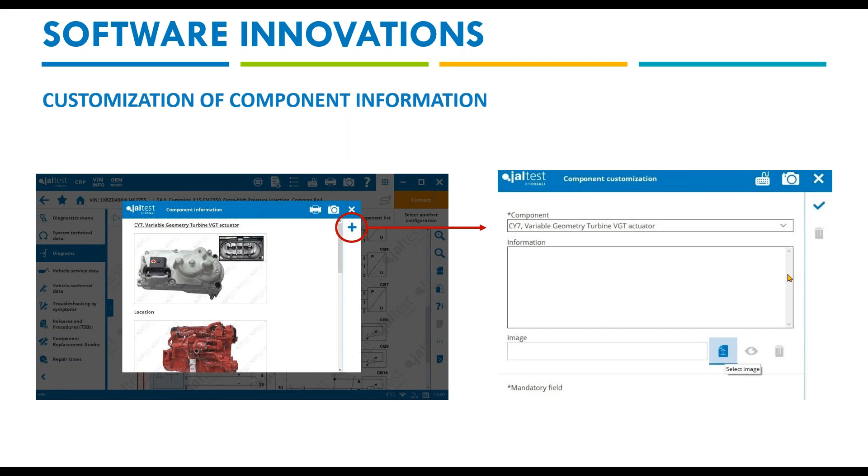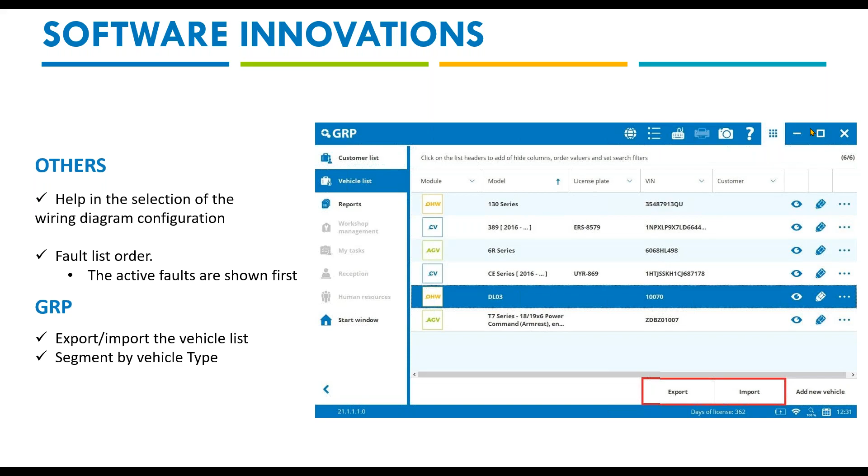So once we've seen the main software improvements, let's go ahead and explore the main innovations added in this 21.1 version for commercial vehicles.

Before starting, I'd like to make a quick note to remind you that you can always check our coverage through Jaltest Report, located in the customer area once you log into jaltest.com. Or if you prefer, you could go to our website, either jaltest.com or Cojali USA, and look for the coverage section.

So we start our way through the different vehicle categories, focusing now on the most important innovations for heavy-duty vehicles. It's important to mention that we're going to highlight the most important innovations so as not to make the webinar too long. However, there have been many more developments for the different brands and systems.

So if you'd like to know all of them, please access your customer area again and find the documents with all the details.

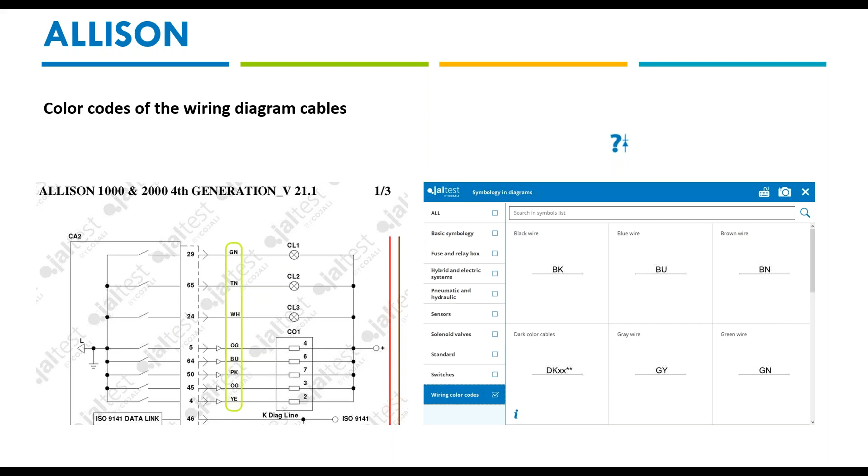So starting with Allison, we have included the color codes of the cables in the wiring diagrams so that physical checks of the wires become easier. As you can see in the picture, each color has a two-letter nomenclature, and although it's very intuitive, in case you want to make sure and not be wrong, just go to the help guide on the right side, where you can check the color meaning.

So let's move to Caterpillar now. As you may know, some specific functions in Caterpillar are protected by a factory password, for example whenever we want to clear those faults called events, or when we want to carry out advanced controls related to the DPF system.

From this 21.1 version, we have included factory password management so that, for example, we can perform the DPF ash service reset or the DPF replacement, both in the EPA 07 engines. Also, this factory password management will make possible the modification of the engine serial number.

And it will even allow us to clear those fault codes called events from the system's memory, as we said before. It's important to take into account that the code or password itself is not provided by Jaltest. So if you're wondering how to get it, you could always go to your dealer or even ask Google.

For Navistar International, we continue adding advanced dealer-level functionalities that until now were only possible through Diamond Logic Builder, the OEM tool. In this case, more than 450 bidirectional tests for the body controller module have been added, such as different component actuations or activations related to lights, doors, switches, etc. These activation components are very important to make sure that the wiring is correct and that the component is acting the way it has to.

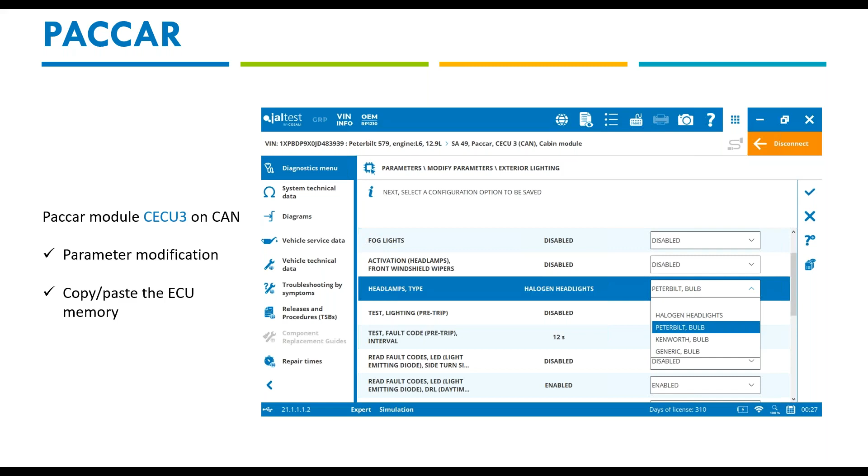So let's move to Volvo and Mack. In each update, we work to expand the references and variants of all the systems, increasing the coverage and ensuring the reliability of interactions with vehicle systems. It's important to mention that electronic systems may have many different variants, even over 1,000 of them, as happens in Volvo.

Well, until now, you had the chance to send Jaltest feedback to let our customer or technical team know about it, and many times, with their help and connecting through an advanced mode, we could help you to connect. So from this version, we go a step forward and give you access to extended and updated coverage in new software references and system variants through web services.

What does it mean? Whenever you have that unknown system variant message we mentioned before, in addition to sending this Jaltest feedback, you could search your system variant in our database through our web services. You will need an internet connection. In this way, if you are lucky and your system variant had been recently added, you could connect to it and have access to the full capabilities of that system.

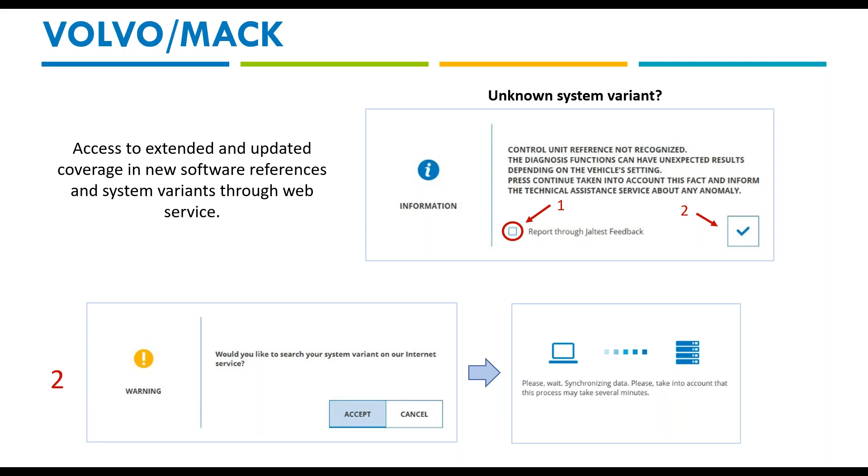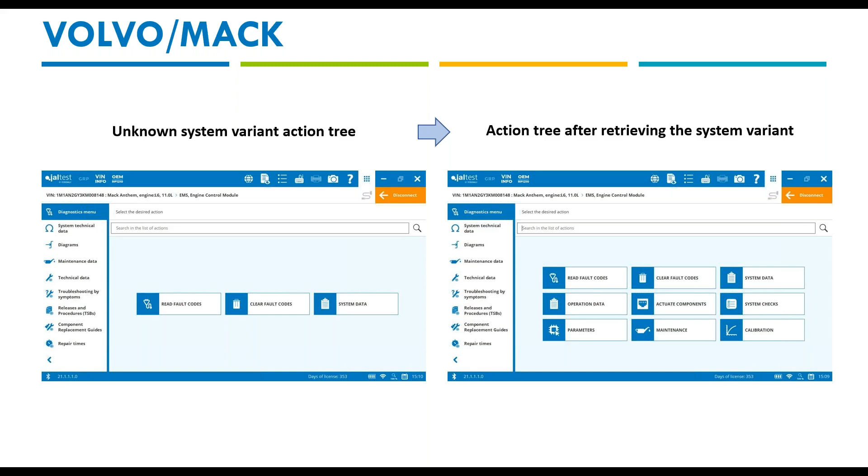Before going forward to the light commercial vehicles, I would like to mention, also related to the Volvo Mack system variant, that even if we're highlighting this innovation in the commercial vehicle section, this is also applicable to the off-highway model, since the B3 technology of Volvo is present in these vehicles as well.

Now, let's move forward and see what is new for light commercial vehicles.

In this 21.1 version, we will see how the family of makes and models included grows with the addition of light and medium duty 2020 and 2021 models with 7.3 engine, from F650s, 750s, and also the pickups and the Van E series.

In addition, we improved the capabilities for the PCM Cummins 6.7 engine found in Dodge Rams from 2013 to 2017. Related to this manufacturer, although not in this version, we would like to announce that very soon we will have the unlock of the security gateway for 2018 and newer models, which is necessary to perform diagnostics on these models, as you know well. That is something many of you were requesting, so we worked on that, and it's coming shortly.

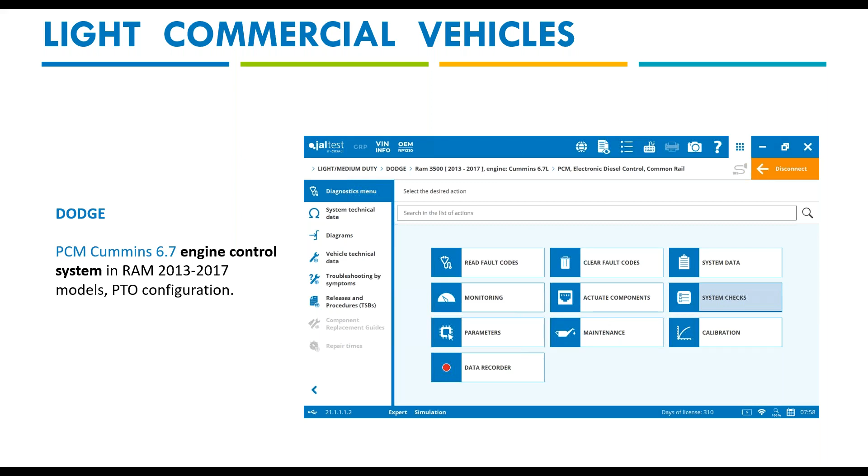Moving to trailers, the Gen 2 or GEN2 ABS system from Globtech Manufacturing has been added. For this one, we will find diagnostic capabilities, live measurements, ECU data, and technical information.

And with this, we put an end to the part of the webinar dedicated to general software innovations and innovations related to commercial vehicles.

Next, we will talk about innovations for off-highway vehicles and agricultural vehicles and equipment. For all of you interested only in commercial vehicles, I would like to say thank you so much for joining today, and of course you are more than invited to continue watching.

Okay, thank you. So the new brands we have integrated in Jaltest off-highway are the ones you now have on the screen. That includes, for example, XCMG, one of the biggest Chinese construction equipment manufacturers. Also, we have new material handling makes like Jungheinrich, Skytrak, or Toyota, but also other makes like Dressta, Vermeer, and stationary engines like Himoinsa.

Jaltest off-highway is the largest aftermarket solution in our industry, bringing dealer level coverage in more than 3,000 systems and more than 100 makes. But it doesn't mean our work has concluded. We are committed to this development, and Jaltest is growing every 4 months with more coverage, more technical information, and more functionalities designed for our customers' needs.

So let's have a look at some of these new updates, starting from earth moving equipment, and it couldn't be in another way than starting from Caterpillar. We have a new system in telehandlers and excavators, the MCM, that covers the hydraulic system for this machine with dealer level bidirectional test, like the calibration in the solenoid valve. Through this task, the ECU will learn the minimum and maximum position of the valve, and it's a manual process in which Jaltest will let the technician know how to use the joystick in order to configure this minimum threshold in which the ECU will sense the electronic communication.

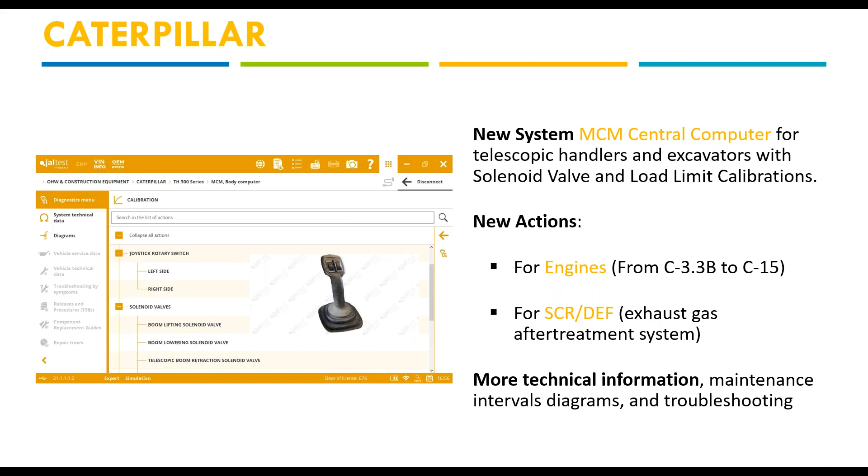Let's continue now with Volvo construction. We have integrated a new calibration for wheel loaders that came directly from our customer petitions. As Marcos already mentioned, we are always trying to develop our solution by following not just the market needs, but also our customer petitions. We want to provide you the most personalized solution for your diagnostics, and this is an example of that.

This is a calibration that is now available in all Volvo wheel loader L series. It's a transmission calibration that, through an automatic test, allows you to adapt and improve the performance of the transmission by connecting directly with the ECU electronically.

There are several reasons why a calibration is necessary, for example after changing a component, after repairing the system itself, or when we want to improve machine operability. After hours of hard work, sometimes the machine starts to operate more abruptly, so this type of transmission calibration is the perfect maintenance to allow the wheel loader to work finer. Workers will have greater comfort carrying out their work, since the calibration reduces vibrations and wear, and finally prevents the breakage of different components.

Also, we have new systems for Volvo, the ones you have on your screen. For example, the TECU transmission system, the VECU central computer system for wheel excavators, and also the exhaust gas after treatment system with options like the fuel shut-off solenoid and the leakage test, plus more new system checks in all these systems.

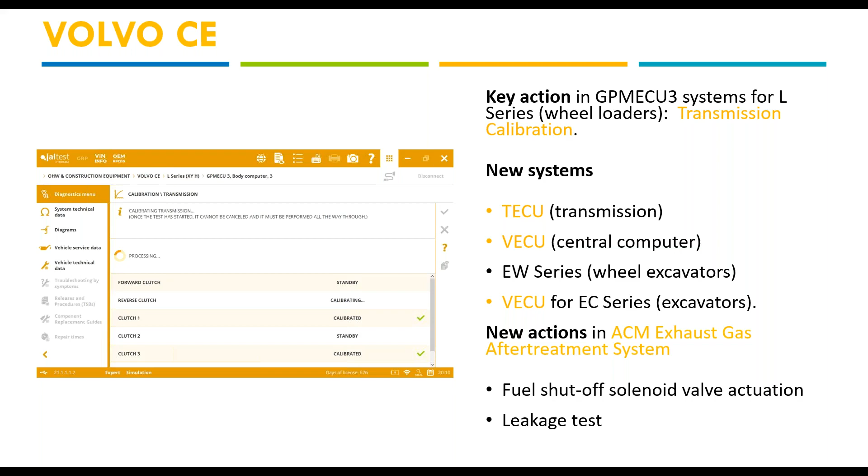Regarding the rest of the earth moving equipment, we have more innovation in other makes. For example, in John Deere, that my colleague Isidro will mention later, or in JCB, in which we have included a new system for excavators and new coverage in the engine of the Diesel Max engine.

I will continue now with material handling equipment, starting with JLG, the most used make of material handling equipment in the United States, where we have greatly increased the coverage in all the models since the last updates. I don't know if you remember, but in 20.3 we integrated dealer level coverage in the software for all the hydraulics of all JLG models.

But we have kept working on this make, and now we have added a lot of technical information, like the maintenance intervals in both hydraulic and engine systems. For example, this time we have a lot of maintenance for Deutz engines, which are the ones that power the biggest JLG machines.

This information is very interesting, especially for rental companies, that can now perform not just the bidirectional test in all the hydraulic system, but also know the recommended maintenance interval in order to work on their own. Once again, Jaltest Software works following one goal: bringing all makes and all system coverage to our customers in order to make them more independent and free when repairing their assets. In other words, you are working with your machines, and we want to provide you a solution that allows you to repair your own machines.

For the rest of the makes regarding material handling equipment, we have interesting developments as well. For example, in Bobcat, we have a new system for telescopic handlers. Also, we have integrated a new system for Linde with a new connector, the GDC 552, a connector for the electric vehicle, plus new functions in Kubota telehandlers, as well as new makes such as Toyota and Skytrak.

I will conclude this part with the new coverage in stationary engines, that is a model integrated in the software. I would like to start with Cummins, because our engineering team has worked really hard on this manufacturer during the development of this 21.1 update.

First of all, I would like to thank them for the great job they have done. Now we can say that the Jaltest Software brings dealer level coverage in Cummins QSF 3.8 engines, because we now have all the bidirectional tests in maintenance for this model. This update means a lot, because customers will be able to perform advanced actions like the SCR catalyst converter regeneration or a DPF replacement without needing the dealer. As you can see in the software screenshot, there are now dozens of bidirectional tests available and supported, as always, with the best technical information.

There are more updates for Cummins and other models. For example, new functions for QSB 4.5 and 6.7 with accelerator lock settings and the SCR system operation test. For QSG 12 and QSX 15, we have introduced in this update the removal of the SCR system inducement mode. That is very useful when we have these blocks because of the after treatment system, and this will provide extra life in the machine.

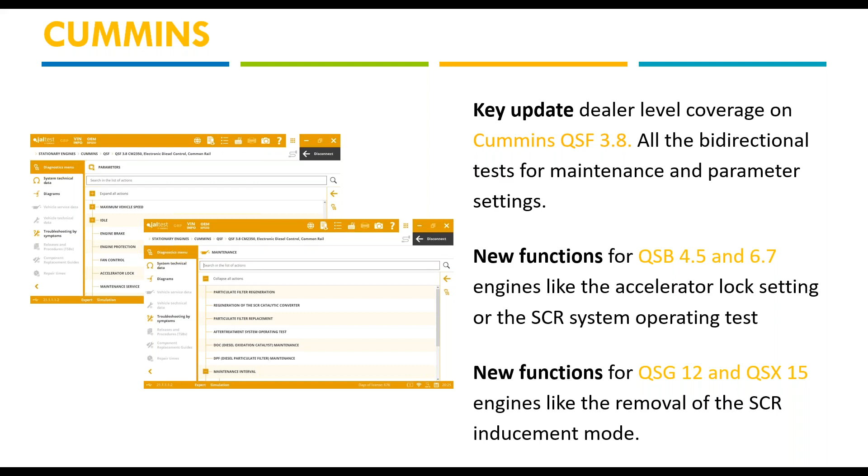Continuing with stationary engines, I would also like to talk about Deutz, because this 21.1 update is an example of the innovation and vanguardism of Jaltest off-highway. For example, we now cover tier 5 engines, an example of that is Deutz. That is the latest emission regulation in the market, which reduces CO2 emissions by making the engine and after treatment systems more advanced in terms of efficiency. What I wanted to highlight is that Jaltest covers the latest models with the best coverage possible in the aftermarket industry.

For the Deutz MD1, one of these latest engines, we have provided advanced tasks like the pressure relief valve reset, a very common maintenance action in Deutz engines that was available in previous models but is now also available in tier 5. It's very common because the pressure relief valve counts the number of times the pressure overrides the estimated pressure within the common rail. When this number reaches its maximum, we need to change this valve and install a new one, so we need to perform this reset.

Sooner or later we will need this, and if we do not have the coverage, we will need to go to a dealer service or another shop that can carry out this type of reset, which again are very common in Deutz engines.

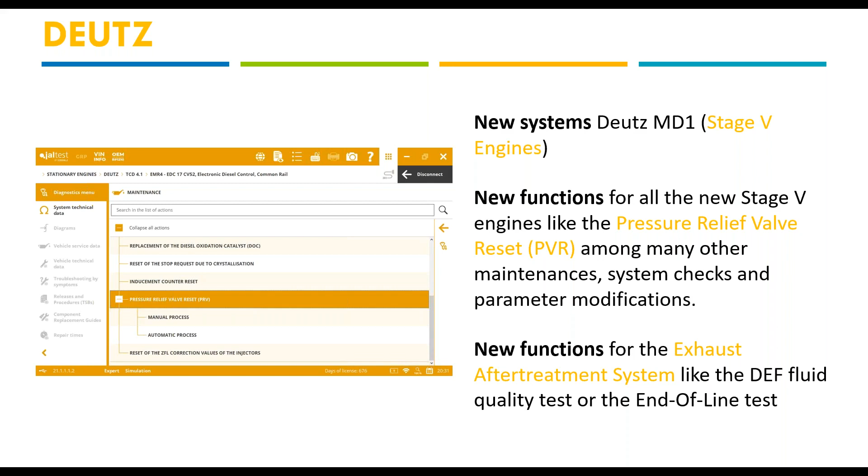I would like to finish by letting you know what is coming now and what we are currently working on, just to highlight again our commitment to keep improving this project every 4 months. For example, we will expand our coverage in material handling equipment with more proprietary systems in the hydraulics, more makes, and also more coverage in Volvo Penta, Cummins, and Deutz engines, with new updates for example in Caterpillar excavators. Stay tuned, because we are working hard to keep being the best aftermarket solution for off-highway machines.

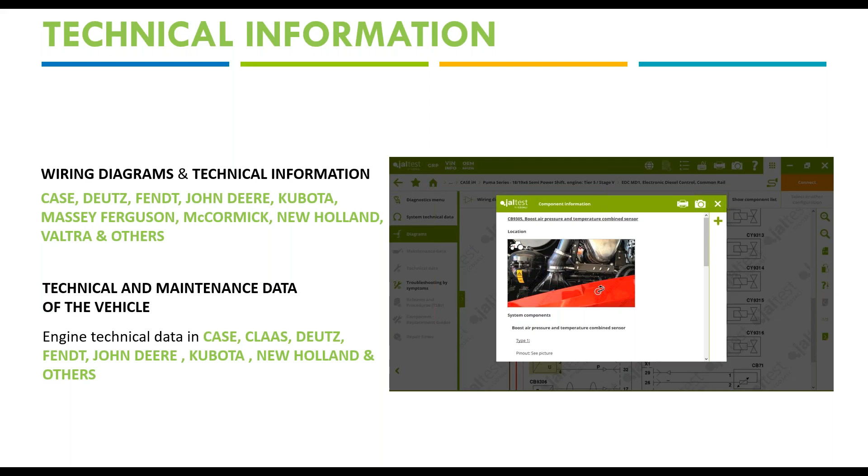So the technical and maintenance data of the vehicle has also been added, because when we are working on a tractor, even if it's ours or someone else's, we need to keep track of the maintenance. And we are also offering this information for the different makes that we cover.

Troubleshooting guides and procedures. This is very important for all of you, because we are offering you to read the fault codes, but you want to know something else apart from the effect and the component that is related to it. And we are working very hard on adding upgraded troubleshooting guides.

So we have added a new make in the troubleshooting ones, that is Kubota. The troubleshooting in Kubota M7 series has been the first one, and we have added the troubleshooting for the engine, the E-CDIS module, the system, and the ACU system, the after treatment system. We have worked very hard on improving this make, because we know that it is becoming one of the main makes in the US market, is growing a lot.

And we have also been improving the John Deere troubleshootings, and you will find a lot more in this version. And also we have been adding different system displays that are very useful for everyone, because in a quick look, you can see how the system looks like, and also check the main values.

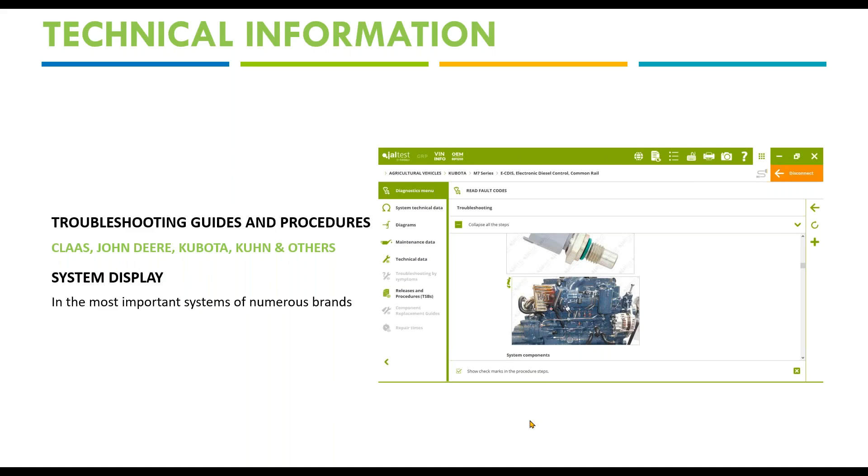I will move on to diagnostics and systems, brand by brand. First, Case IH. We have added different systems, as you can see, the front hitch control system, the instrument cluster, hydraulic lift, the spool valves, transmission, and we are adding different actions like the armrest configuration or the shuttle memory option configuration.

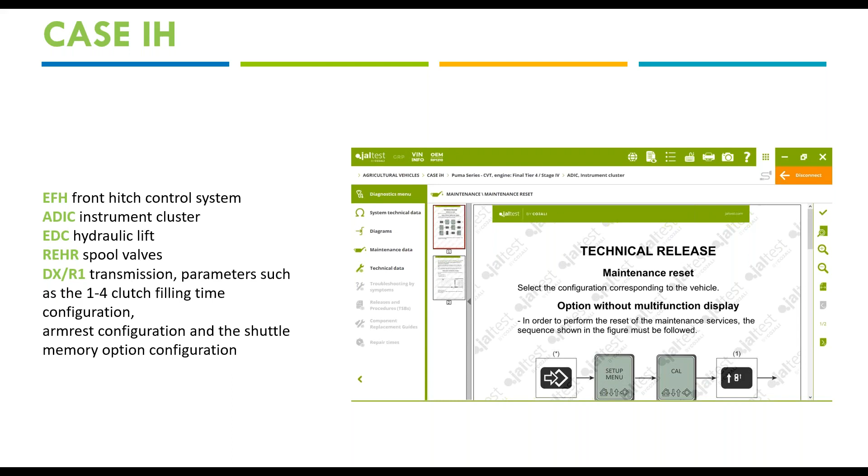Claas, another important make in the market, we have added the GDM transmission and also the control panel for UBM spool valves. I want to emphasize that we are working very hard on adding spool valve systems in all the different makes, because we know how important it is to be able to codify your own spool valves, or when you are exchanging one or configuring them.

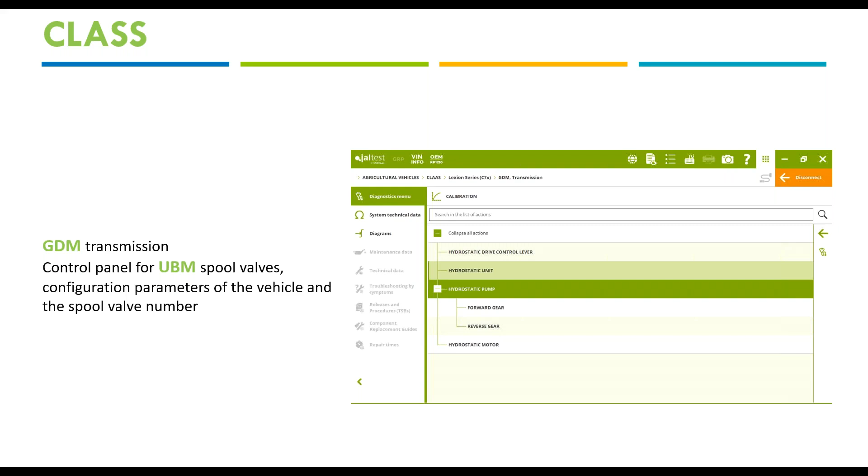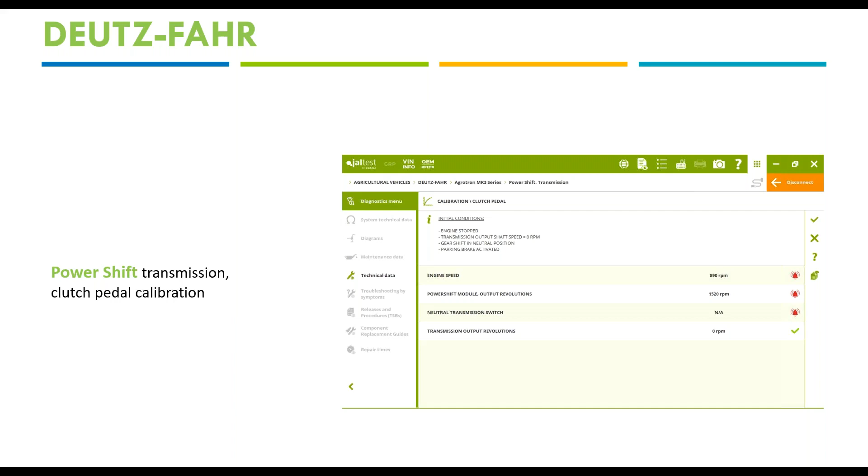So Deutz now. We have added the power shift transmission, and we are also able now to calibrate the clutch pedal in this system. In Fendt,

and it is also coming to the US market, so we will see more of these makes in the North American market. We have added the EOL vehicle configuration system for tier 2 engines and new functionalities of the EOL 7 vehicle configuration system in Fendt, the 800 series models for the interim and final tier 4 engines.

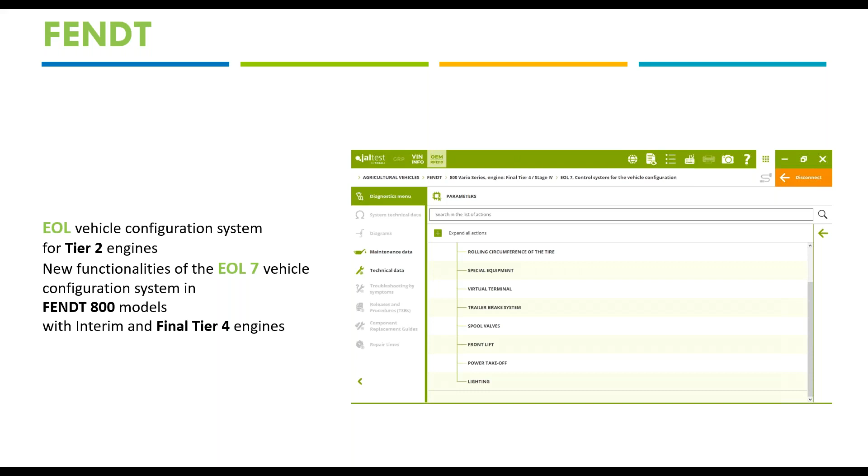John Deere, the main make in the market, we have added this very important action that is the inducement mode reset.

So if serious fault codes take place in the SCR system, the engine control unit will limit the engine power. So what does this operation or action do?

This operation resets the startup counter, allowing an additional startup during which the engine will reach full operating capability for 30 minutes. If after these 30 minutes no fault codes are detected on the SCR system, the engine will work correctly. That's why it's very important, and we have added it in the level 23, 32, 33, and 34 systems.

Now, Kubota, we have added many different systems in this update.

So for all of you guys that work with Kubota, you will be very happy with it. We have added the NAC GPS automatic driving system, also instrument cluster systems, the tractor isobus control system. We have added the central computer for the MGX models, the central computer for M4, M5, L1, and L2 models, and also the CEU central computer for different models.

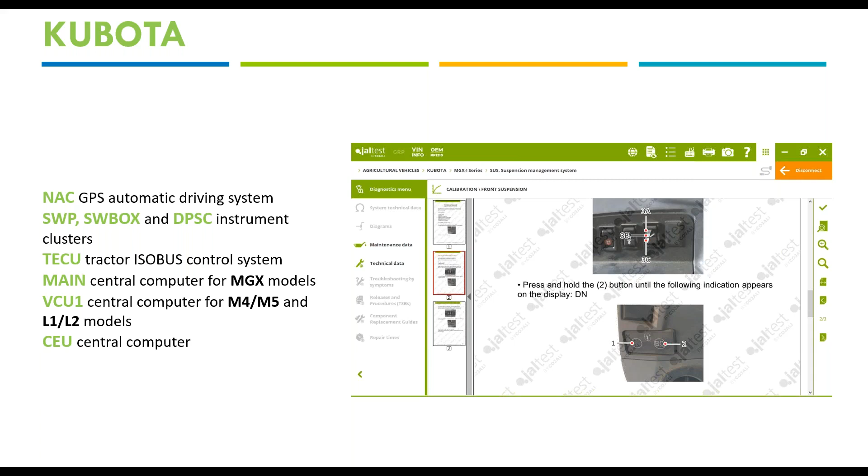As well, much more systems for Kubota: the trailer braking system, even the suspension system for MGX models, the transmission range, the transmission TCU PST that we can see here, and we are able now to calibrate the clutch pedal as we can see on the screen.

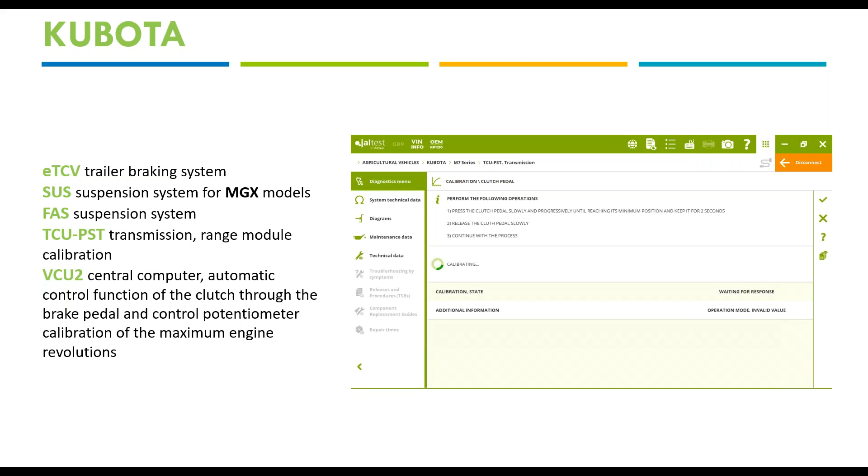We are also able to do the VCU2 central computer, and here we are able to perform the automatic control function of the clutch through the brake pedal and also the control potentiometer calibration that it's very important for this kind of tractors.

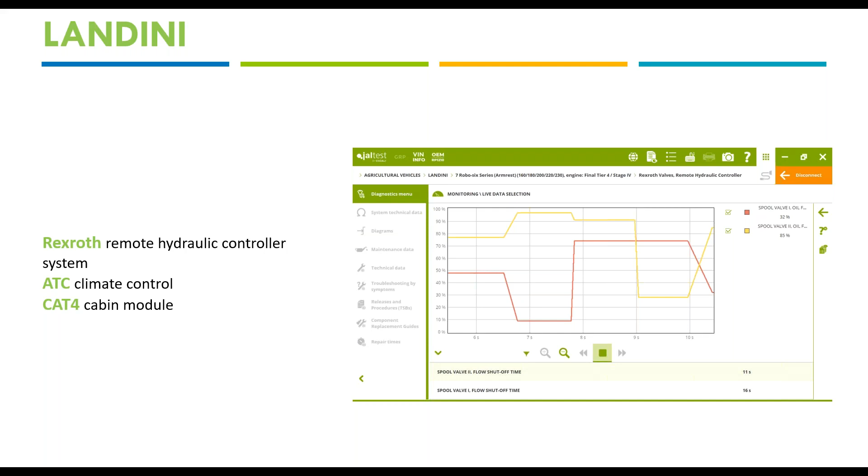Landini is not as important as other makes, but we also want to emphasize that we have added different systems like the climate control or the cabin module.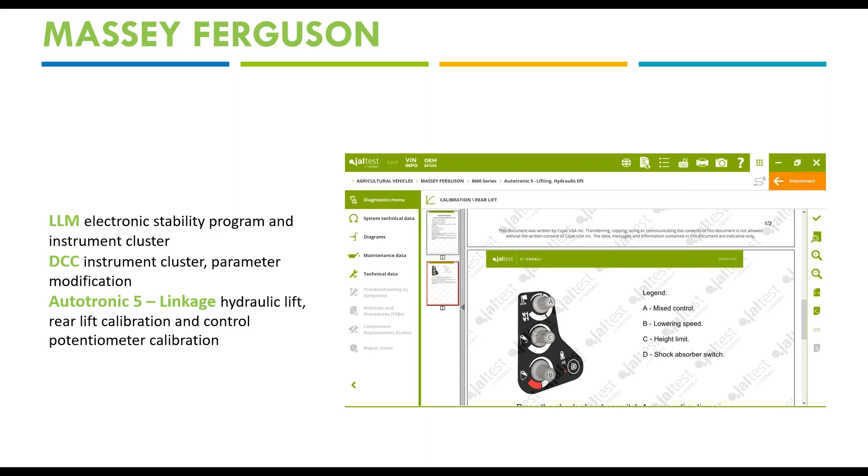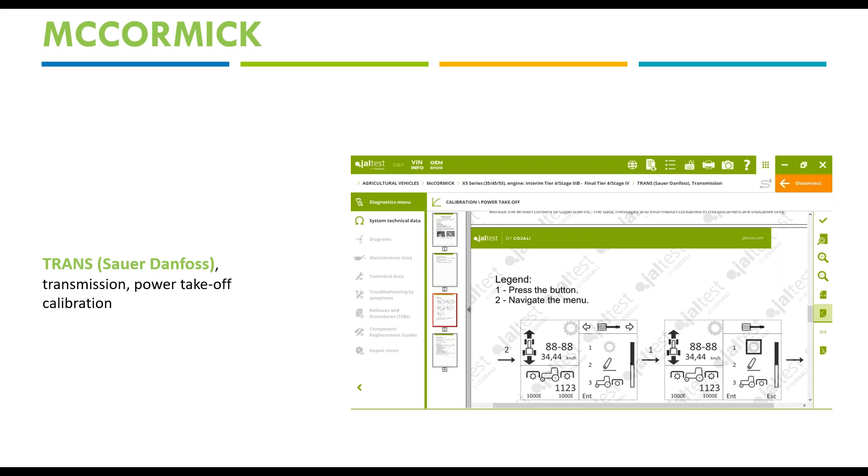McCormick, we have added the TRANS (Sauer Danfoss) transmission, and we are able now to calibrate the PTO. It is manual, but we are giving you the technical release on how to do it. So we want to emphasize how much technical information we have all over the program.

In New Holland, we are able now to connect to the RPTO, rear power takeoff, but also the EDC hydraulic lift, the spool valves system REHR, and the 4WD differential lock, and now we are able to calibrate the steering angle sensor.

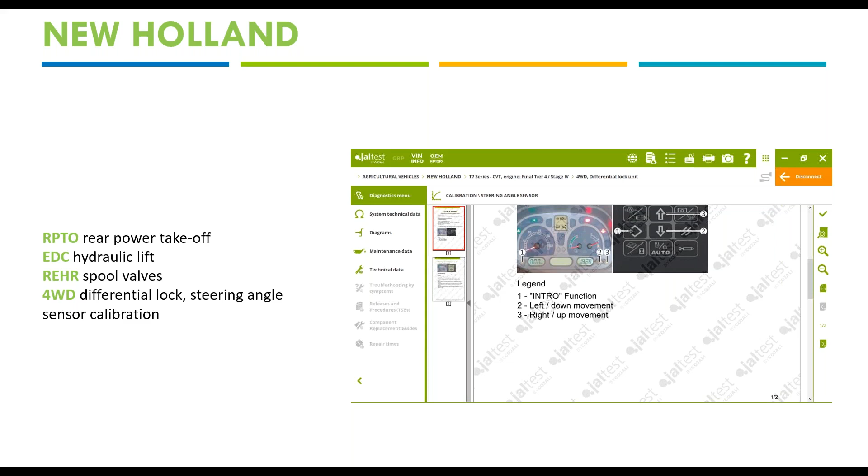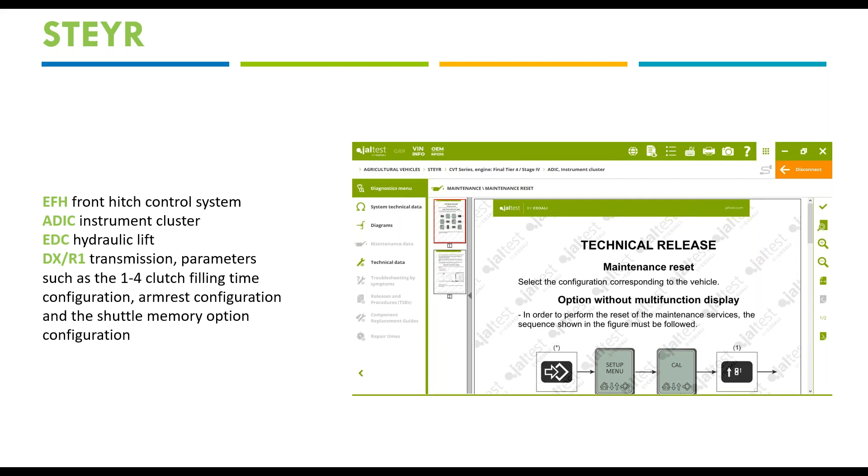In Steyr, as with Landini, it's a secondary brand in North America, but we are able to perform different new actions and also to connect to systems like the ADIC instrument cluster or the EDC hydraulic lift.

Valtra. As you can see, this is an example of how to modify parameters in the number of spool valves installed. So we are giving you the way on how to do it, and we are also adding systems like the instrument cluster, the hydraulic lift, or the central computer.

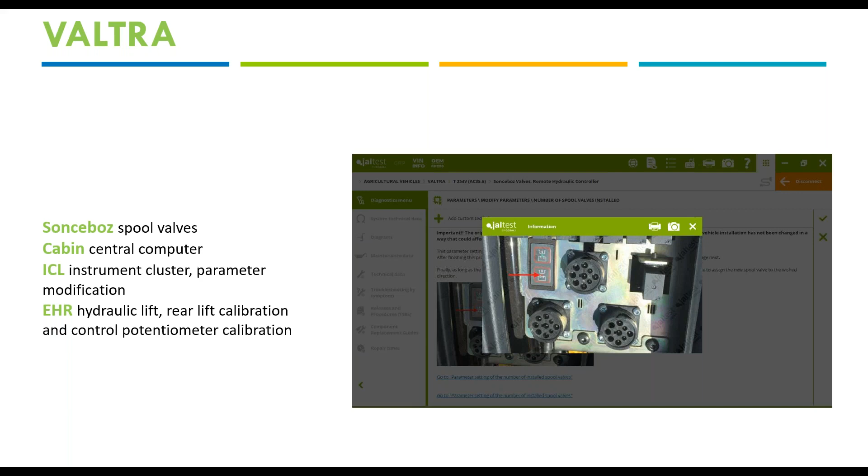Now I want to continue with the engine control system and exhaust after treatment system. And here we can see that we have improved Caterpillar, and we have added models with C13, C15, C4.4, C6.6, and C.9.

In Deutz, my colleague has explained how important it has been for us. And I want to say that we have added the injector coding for Massey Ferguson 7700S in this EDC MD1 tier 5. It is very important, of course, every time that we need to replace an injector to be able to code it. But we have also added in this Massey Ferguson the dev checks and dev maintenance options.

We can see now the Iveco FPT that it's very important for Case IH and New Holland. And here I want to emphasize that we have added the regeneration of the SCR catalytic converter. Through this action, the soot accumulation in the SCR catalytic converter can be removed. This is really important for those Case or New Holland tractors, so the power engine will not be limited.

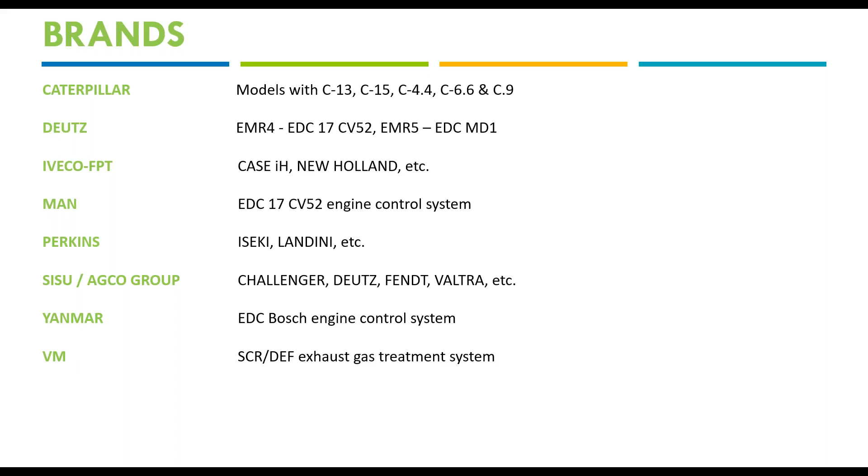And here we can see another improvements in Perkins, Sisu, Yanmar, VM that affect different kinds of tractors in the industry and different systems. Thank you very much for your time, and I hope that you have liked it.